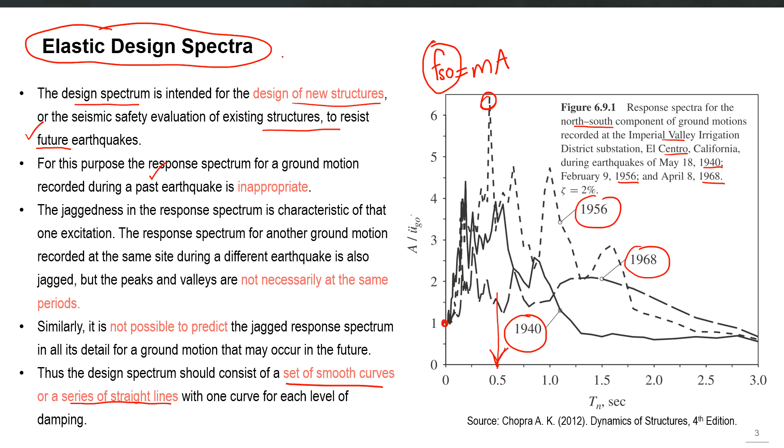So what we can do is normalize or come up with an approximate smooth response spectrum, and that smooth response spectrum is called the elastic design spectrum. Different building codes develop those response spectra, and those are recommended as design spectra for the design of structures against future earthquakes. So we don't use the actual response spectrum of past earthquakes; we use those approximate smooth response spectra as the design spectrum.

There are different procedures to construct such a smooth design spectrum from the ground motion parameters expected at a particular site. So if you have a smooth design spectrum of acceleration versus time period, which looks like this, the level of spectral acceleration at each time period will represent the level of seismic activity or hazard level at that particular site.

If you have two sites, one with a response spectrum that looks like this, number 1, and the other with a response spectrum that looks like this, number 2, you can say that the hazard level of site number 2 is more than the hazard level of site number 1.

The design spectrum should be representative of the ground motions recorded at the site during past earthquakes, with an assumption that the same kind of ground motions will occur again in the future. So whatever type of ground motions a site has experienced in the past, the design spectrum should represent that.

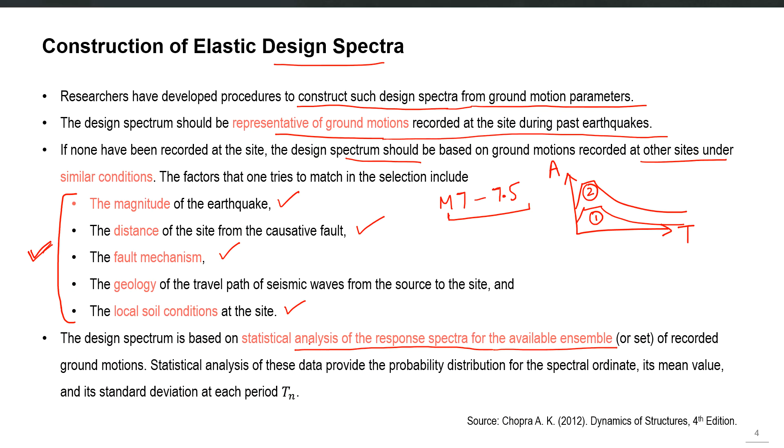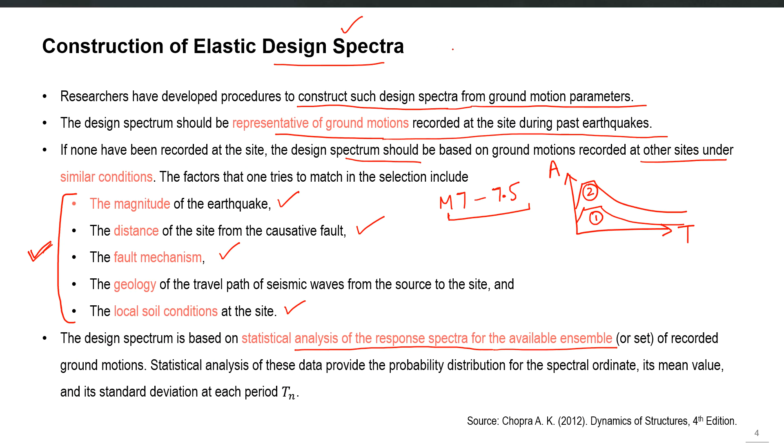The design spectrum is based on statistical analysis of the response spectra for an available ensemble of recorded ground motions. You pick different representative ground motions matching your site's characteristics, and subject them to statistical analysis. Their actual recorded response spectra are plotted and statistically analyzed to come up with a smooth design response spectrum representing the future earthquake hazard level. There are different ways to construct the design spectrum from actual past recorded earthquakes, but we will not go into detail of such methods. I will directly show you how the design response spectrum looks.

Individual ground motions may look very jagged in their response spectrum, but this smooth one will be used for the design of new buildings or performance assessment of existing buildings under future earthquakes. So the design spectrum will be different from the actual response spectrum recorded for past earthquakes and then converted into a response spectrum.

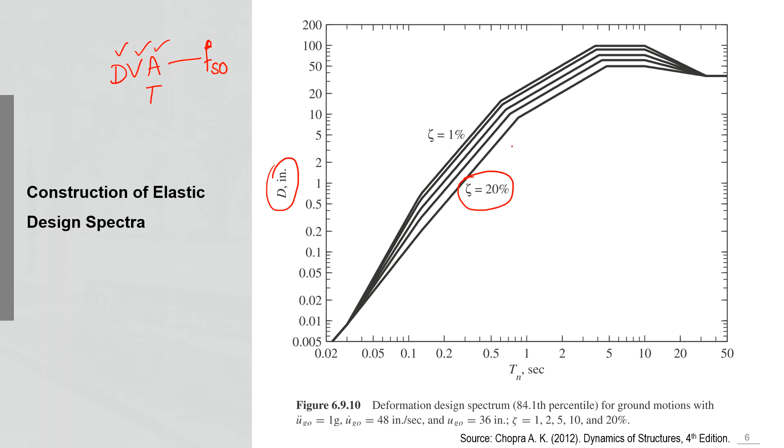Just like in the last lecture we calculated the peak response of a single degree of freedom system against the El Centro earthquake, using its DVA response spectra to pick peak displacement, velocity, and acceleration, converting it into FSO, the effective earthquake static forces applied to the structure to calculate other peak responses. For the design of new buildings subjected to any future earthquake, we will not use that past recorded earthquake spectra. We will use a smooth design spectrum which may look like this one or the one shown in the last slide.

For your own damping ratio, you will pick the curve and then use it for the design purpose. Apart from this method, you select representative ground motions from a detailed database of ground motions, and apply a statistical analysis to the spectra of those ground motions.

This comes up with the design smooth spectrum. There are some other modern methods of constructing the design spectrum also, including the use of probabilistic seismic hazard assessment or analysis, which considers the past rate of seismic activity on all faults that may contribute towards the hazard of a particular site.

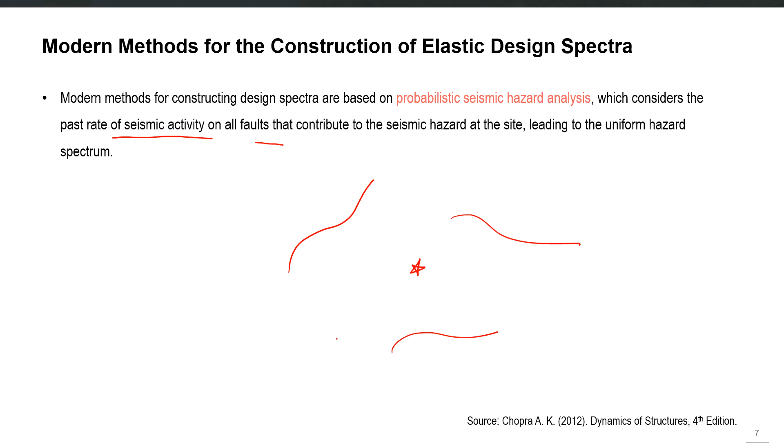So if you have a particular site here and different faults around it, this method considers the activity rates, seismic activity rates, for each of the faults A, B, C, D which may contribute the hazard at that particular site.

At the end of this analysis, you construct the design response spectrum which may represent the future ground shaking, which will be a cumulative result of all of these seismic sources A, B, C, D considered in the analysis.

So there are certain modern ways of developing the design response spectrum also, but we will not be going into detail of this method or any other method of constructing the design spectra. We will just introduce this concept for the purpose of design of new buildings or performance assessment of existing buildings.

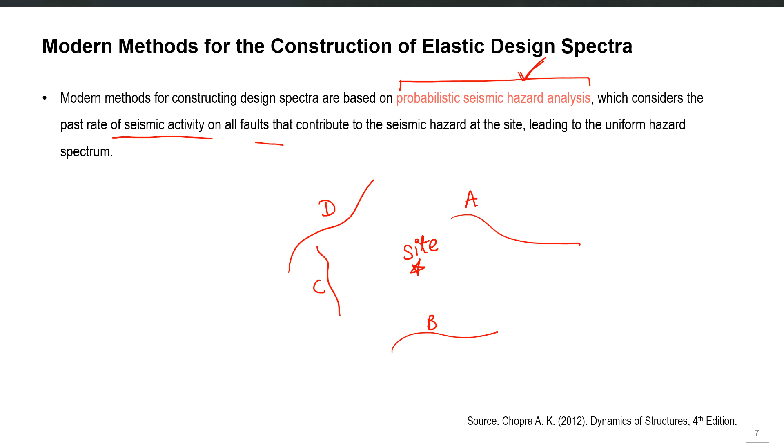This elastic design spectrum provides a basis for calculating the design force, basically the effective earthquake force for a future earthquake, which should be applied in order to design the elements of a structure, and the deformation of single degree of freedom system U naught to be designed to remain elastic.

If we design our structure based on this force, calculated from either K times U naught or m times the pseudo acceleration, our structure is going to remain elastic during the design earthquake level. For this purpose, the design spectrum is used in the same way as the typical response spectrum for an actual past earthquake.

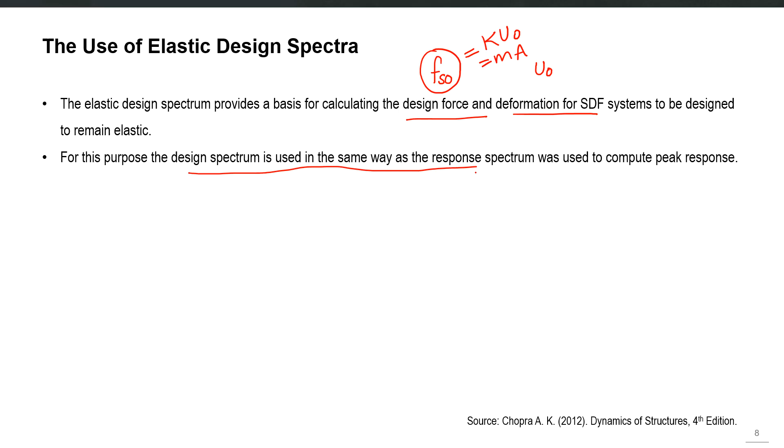Just like we use that response spectrum for a past earthquake, we use the time period of our structure to pick U naught, or to pick A, the spectral acceleration, and then these two quantities can be converted into the design forces, or effective forces, or peak forces experienced during the earthquake.

So we can use the design spectrum in a similar manner. Instead of that jagged spectrum, now we will be using a smooth spectrum which represents the future earthquake. So the use is the same.

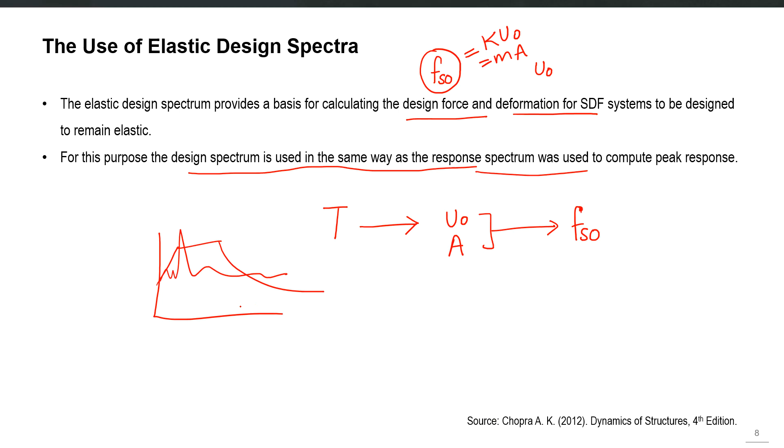If we compare the design response spectrum with the actual response spectrum of a ground motion from an earthquake, there will be differences. Obviously, the smooth design response spectrum will also have that DVA form, the same form, the velocity, acceleration, and deformation, the same kind of graph.

The difference is also due to the inherent variability in ground motions and responses. Each individual ground motion will have a spectrum which will not match the standard design spectrum, but this standard spectrum represents an average effect of the future earthquake loading, and that can be used for the design of new buildings.

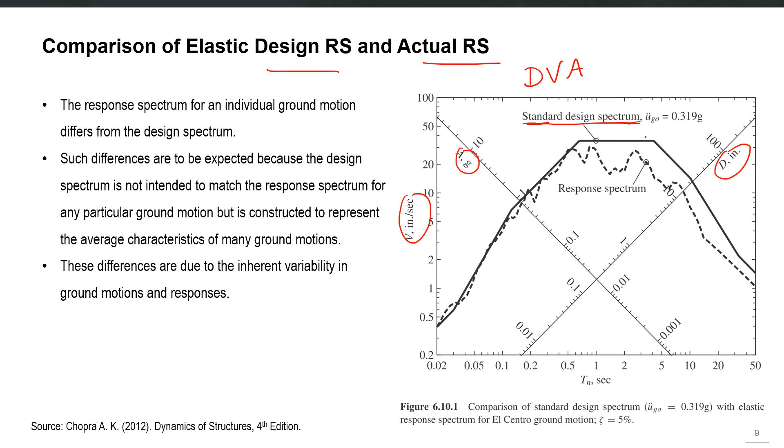So the design spectrum is conceptually different from the actual response spectrum of a past recorded earthquake, in two ways. One is that the jagged response spectrum is the plot of the peak response of all possible single degree of freedom systems, and hence it is the description of one particular ground motion.

This is very important: the actual response spectrum represents just one ground motion, but the smooth design spectrum is a specification of the level of seismic design force or deformation as a function of the natural time period and damping ratio.

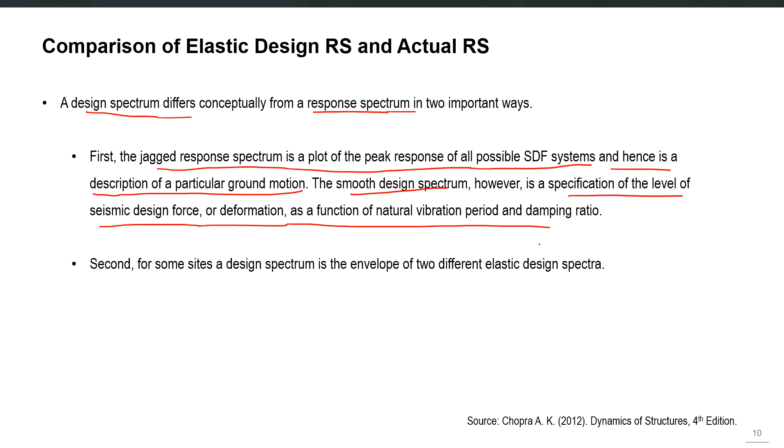The smooth spectrum basically tells you the level of seismic hazard at your site, the level of seismic forces you may expect in a future earthquake. The actual earthquake record will be jagged and represents only one ground motion, but the smooth spectrum represents the average effect of many possible ground motions.

A second point is that for some sites, a design spectrum is the envelope of two different elastic design spectra. So sometimes you can plot the actual response spectra of different ground motions and use their envelope as the design spectrum.

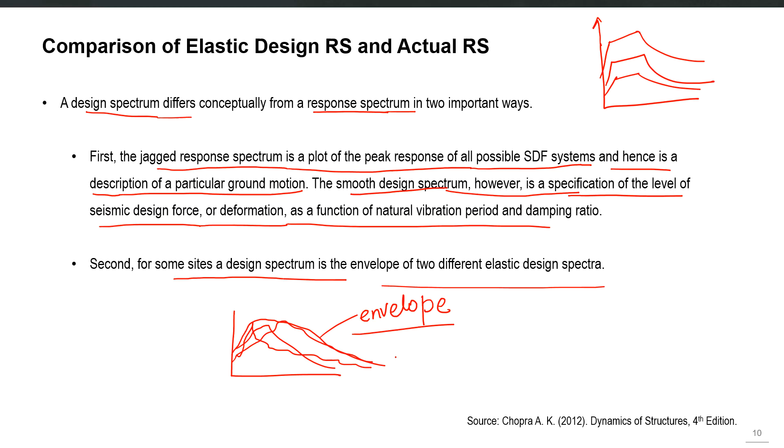If you have one actual past ground shaking with this spectrum, and another with a different one, you can construct an envelope curve, and that smooth envelope can be used for designing new buildings against future earthquakes. This is another difference between the actual response spectrum of a past recorded earthquake and the design spectrum for a future earthquake.

Let's say there is a site, with one seismic source A nearby and another seismic source B far away. Source B, though very far from the site, can produce a magnitude 8 to 8.5 earthquake, while the close source A can produce a magnitude 6.5 earthquake. The seismicity at this site is governed by these two seismic sources.

If you plot the response spectrum for the moderate sized earthquake, 6.5, at a small distance from the site, and also plot the spectrum for the case of large distance but high magnitude, the shape of the second spectrum will be different. One is moderate size at small distance, the other is large earthquake at large distance from the site.

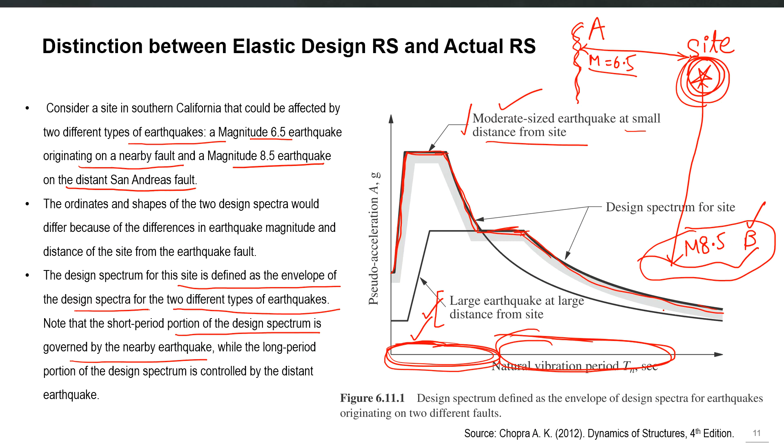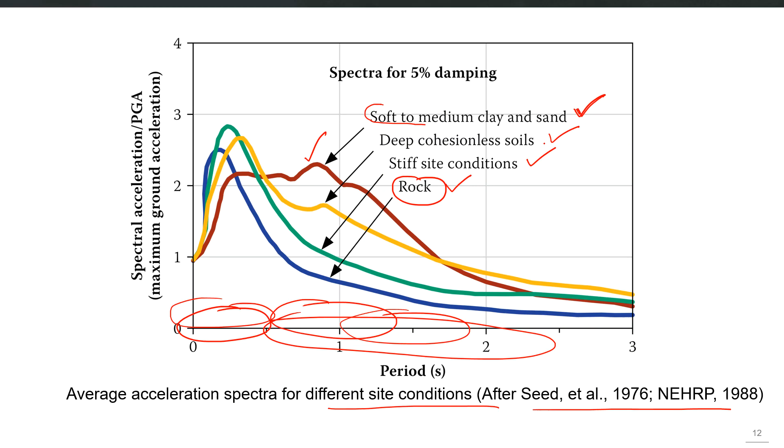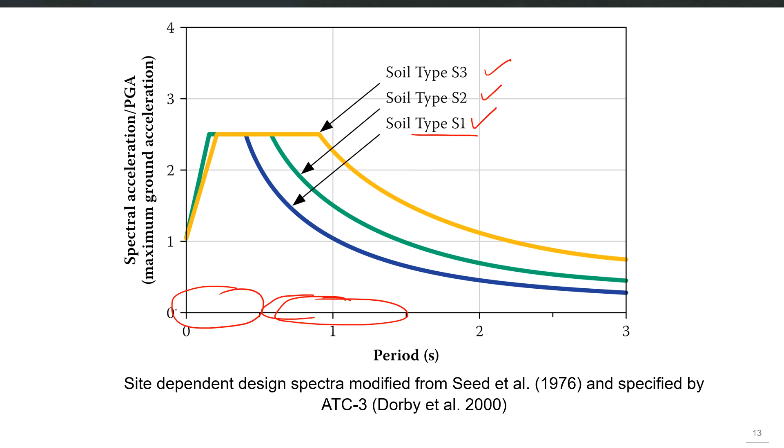Similarly, another example you can see here for different kinds of soil types, S1, S2 and S3, from this particular reference. This is the design spectrum, a smooth spectrum, and you can now guess that S3 would basically be the soft soil and S1 will be the rock soil or very stiff soil.

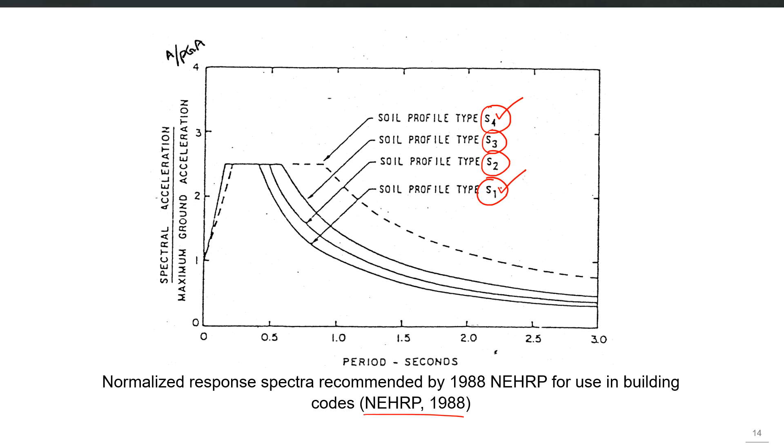So this way you can come up with the response spectrum for a future earthquake by just following these building codes. The methods to construct this design spectrum will not be covered in this lecture, and that will also be a very important topic. We will cover that in some other lecture. This will lead us to the next topic, the concept of inelastic response spectrum. I think I will end here, and I will cover this topic in the next class.

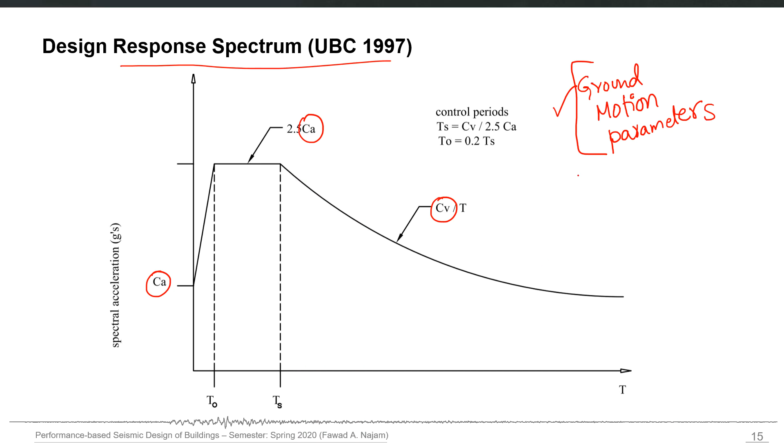For the case of UBC 97, the site parameters are CA and CV, and the procedure to pick CA and CV values for your particular site can be found in UBC 97. You need information about the site class of your site, basically the soil type, and second, the seismic zone. UBC 97 proposes a seismic zoning of a particular area. So if you know which seismic zone your site is in, and what site class it represents, these two pieces of information can be used to pick CA and CV for your particular site, which can then be used to construct the design response spectrum for a future earthquake.